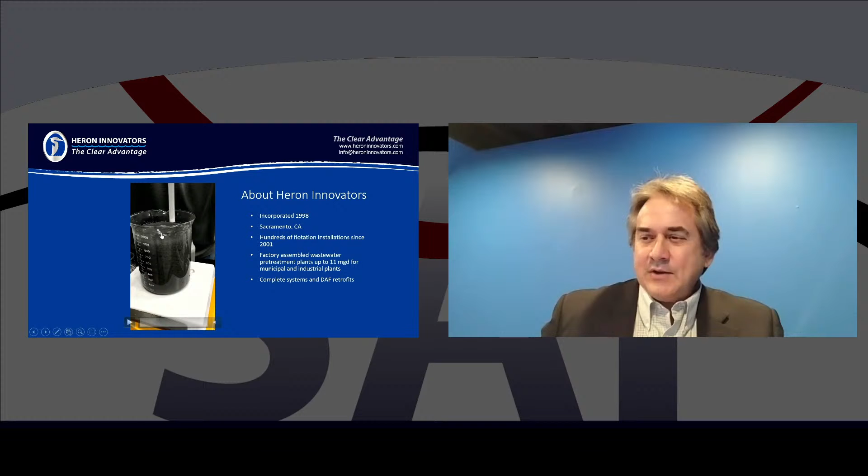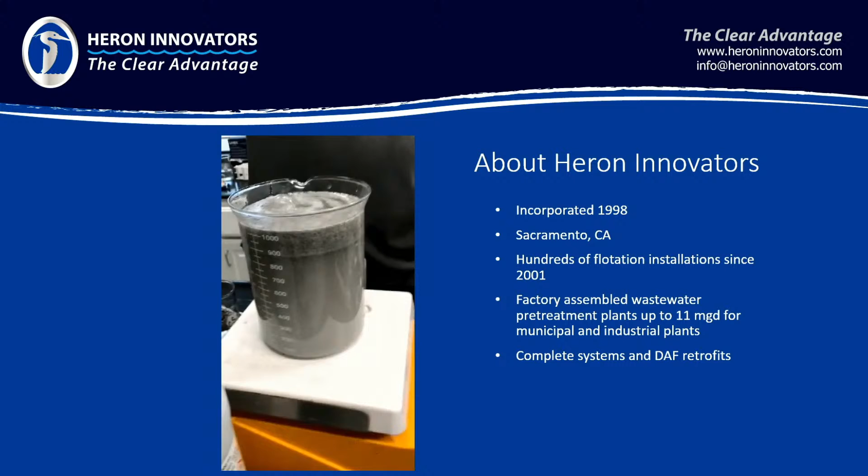This was very odorous material, and I don't know if it's coming through on your screens, but there is a pin floc. We put in just a little bit of coagulant, a little bit of polymer. There's a pin floc there. And what we're going to do is inject this charged microbubble froth. And I think what you'll see is those particles are actually getting bigger as the air attaches to them. And you see we get a very high capture rate, a very fast rise rate, and a very robust float.

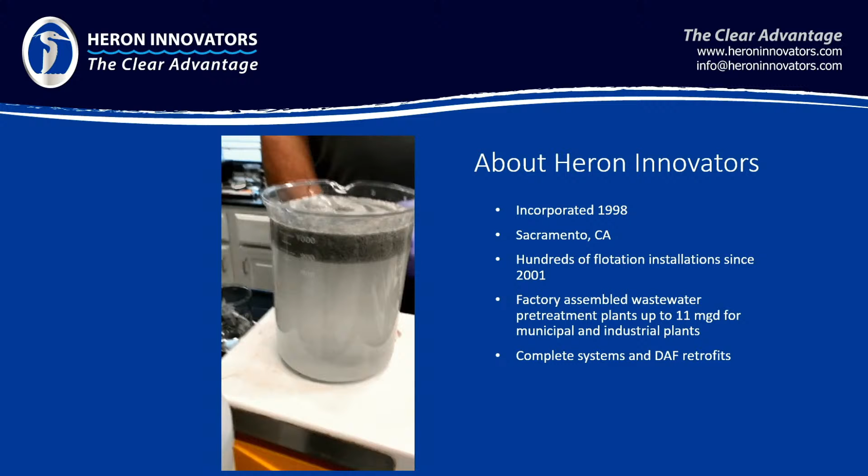And I had the environmental manager of this company standing next to me, and he let out a wow, that's really something. So he and I went around and looked at 3 different installations, one in Missouri, one in Kansas, and the third one was in California, where SAF was installed in all 3, but that California one was actually on anaerobic biosolids. And it was amazing results as well. And in fact, that particular installation was presented at WEFTEC a couple of years ago.

So let's start off with what we said was flotation without dissolved air. So let's talk about how we do that. Get to the next slide. So let's talk about what traditional flotation is that uses dissolved air. And at first glance, SAF looks very similar to DAF, or dissolved air flotation, but when you really dig into the mechanics of how this works, it's a very different technology.

So in a DAF, what you've got is your influent coming into a flotation cell. And then there's usually some kind of recirculation going on where you're grabbing the underflow off the bottom of that cell where the water is theoretically cleaner. You've got a recirc pump pushing against back pressure. You inject in compressed air. Under pressure, air dissolves in water up to a saturation point. What that saturation point is depends on the physics of the process, temperature, pressure, how dirty the water is, but you're going to hit a saturation point.

And then when that water and air re-enters this flotation cell, now you're at a lower pressure. All you've got is the head pressure of the vessel. So little bitty soda pop bubbles are going to come out of solution to float those solids that we flocculated with chemistry upstream, float those to the surface, and there's usually some kind of rake skimmer here where we're going to skim those off and dispose of them. So that's basic DAF. And that technology's been around for 100 years. It's what we think of as a conventional or traditional flotation.

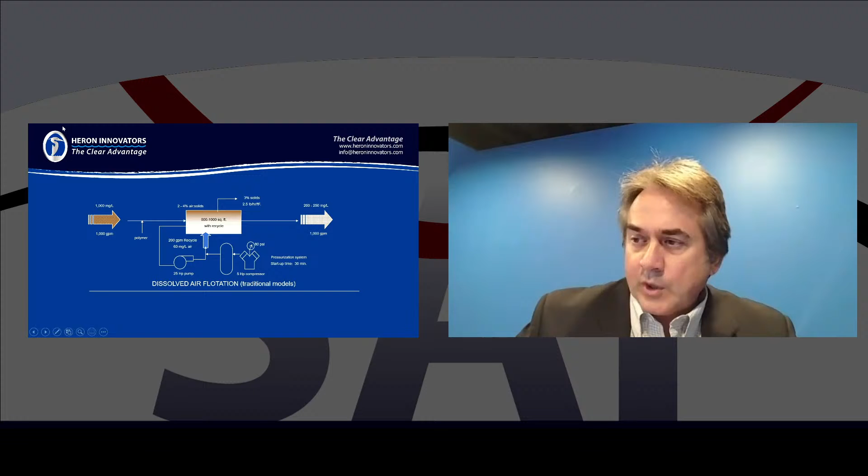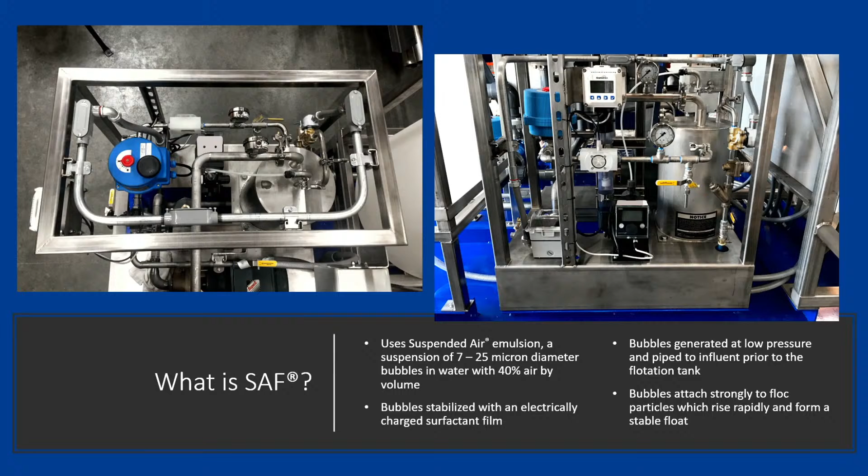There are permutations of this design where you've got cavitating pumps and sparging in air, but we're going to do something a lot different. There's going to be no dissolved air involved at all. So instead, we've got a froth generator. And this is just a little skid. The physical footprint's about 4x4, 4x6 in size. And what we're going to do is create a charged microbubble froth and inject that into the stream right here and stir that charged microbubble froth in.

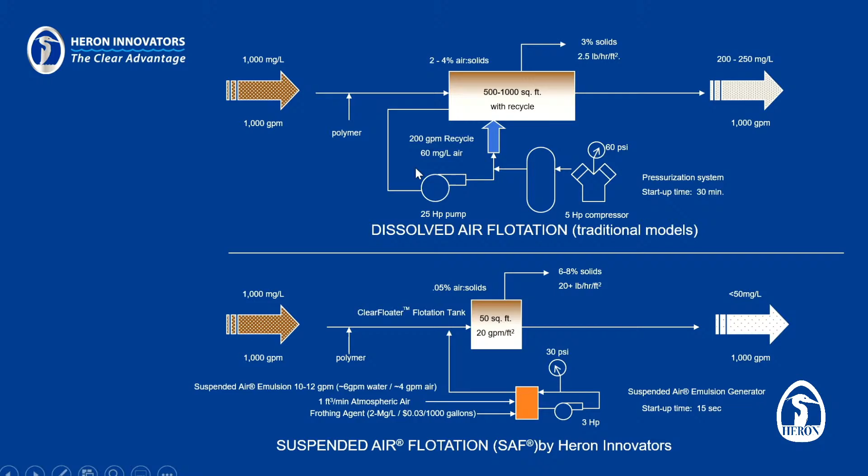I'm going to ask John to describe that froth and those bubbles, because you might think that, well, in fact, let me explain. There's 40% air in this froth. Here you've got somewhere around 2 to 4% air with a DAF, based on what the saturation point is. We're not dissolving air. We're creating this froth with the surfactant, injecting it in, which is 40% air. So we've got a lot more air, but you might think, well, can't you just inject more air? And there are technologies out on the market that do that. They just sparge more air in.

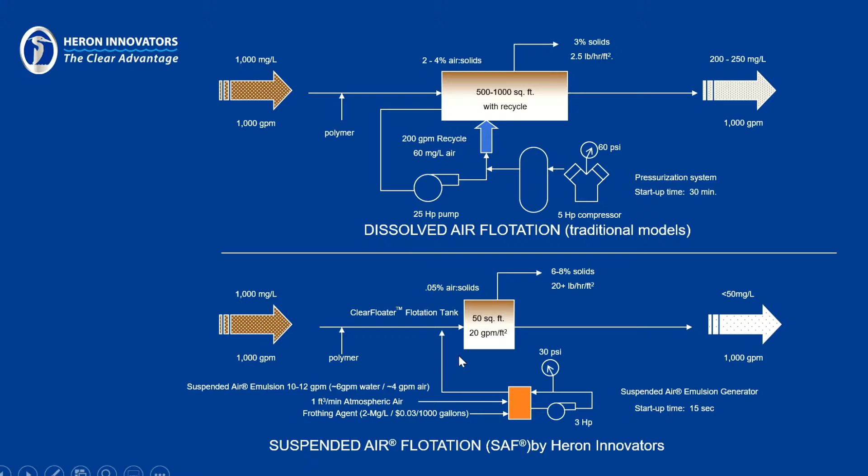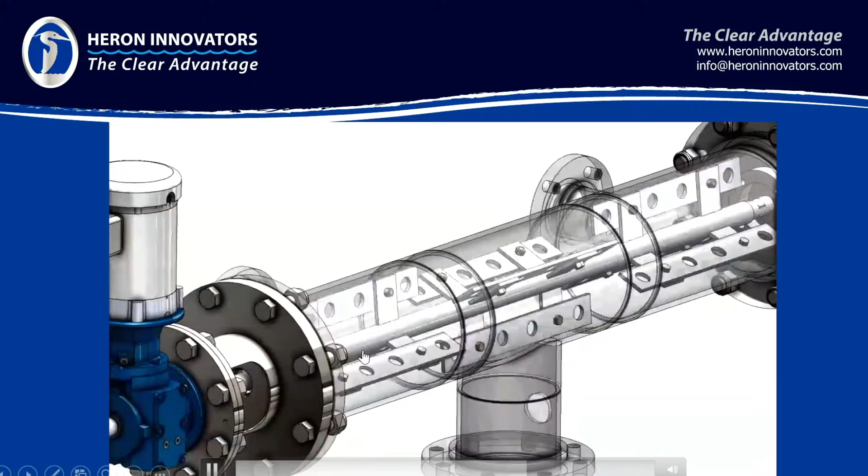But these bubbles are much different. And then they're going to be stirred into the process with something that looks like this. So the influent's coming in here, froth's injected here, and they're going to be stirred in very gently to get a good air to particle reaction. And then it enters the flotation cell.

So John, I started to say earlier, how are these bubbles different than what you might see with this technology? Thanks, Jeff. So, I like to say that we're not bound by the physics of what it takes to saturate air and water. It's because we are actually making a soap bubble.

What we learned how to do is create a population of bubbles that are 7 to 25 microns in diameter. They're actually double walled; in the literature they're called an aphron. Like Jeff said, in our whitewater we're not restricted by those physics, so we're not looking at 2-3%. We're looking at 40% or higher air in what we call our whitewater. It's nothing like a DAF whitewater, of course.

Those bubbles have a surfactant sheath on them, and they have a charge on them. They're anionic or cationic, depending on the surfactant you use. Because of the bubble size, we get a really good electrostatic attraction to the particles. But the big thing is that we have a surface tension advantage over a DAF bubble, and that surface tension advantage overcomes the surface tension of the particle, so we get a lot more air on those particles.

Between the size and the charge and the air, we have about 1,000 times the affinity for a particle that a DAF bubble does, and we actually participate a bit in coagulation lightly. That does translate to some significant chemical savings.

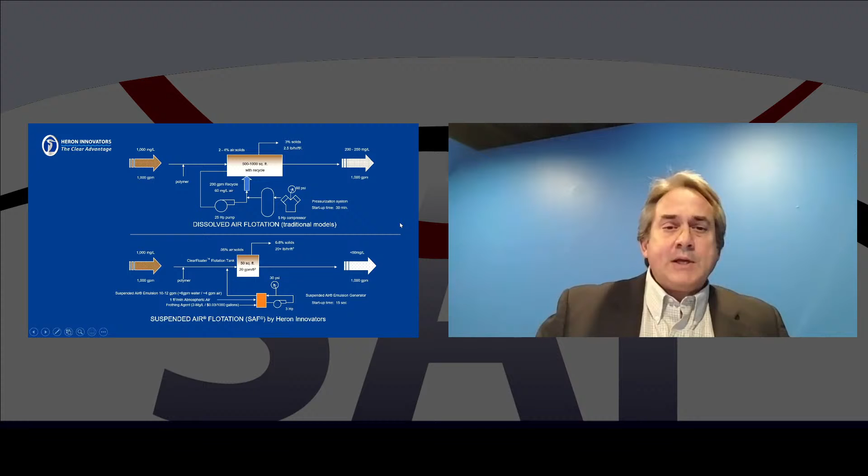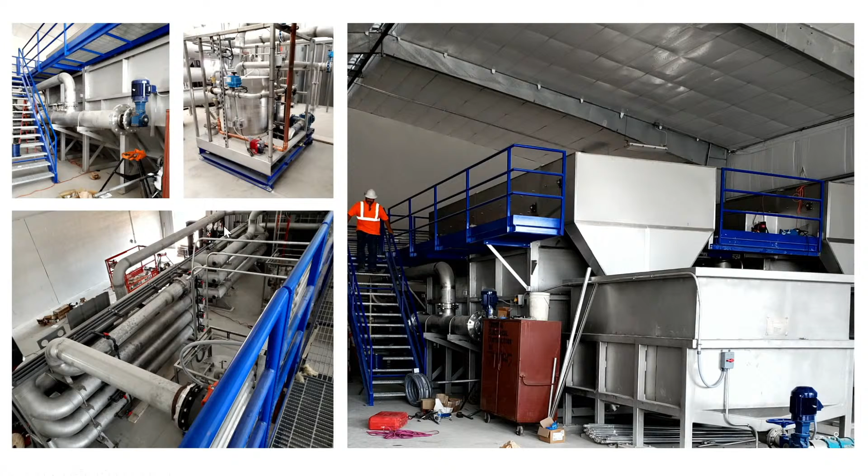So that is a lot of times why we get into clients where we convert DAFs over to SAF and create all kinds of benefits. So let's talk about those benefits, and then we'll go through a couple case studies where we've converted DAF to SAF. In fact, I forgot I have these pictures. John, if you want to talk about these a little bit. We've had diagrams, so now we've got actual pictures of what this equipment looks like. So, John, go ahead, explain this.

Yeah, thanks, Jeff. Up in the upper left corner there is an actual floc mixer on our model CF1000 float cell. You can see the motor and the gearbox driving a paddle mixer that's attached to a VFD, so that we can control the mix energy going into the unit. You might ask why we need that. In the DAF world, you need volume to get enough air. You're moving around 15, 20, 30% of the water, depending on the waste stream.

That's going to mix. We're normally looking at what I call a recycle stream or a whitewater stream that's something around 1% of the flow. I need to mix that quickly without disrupting the floc, so that we evenly react the floc aid with all the incoming water. We see really good advantages of using that, and we've got it on all our installations, including the conversions now.

To the right of that is an SAF generator. That's our secret sauce. That is what makes the foam, what we might call whitewater, and that gets delivered to the process. Any pressure we see in that canister is basically just to create agitation and deliver to the process, as we build no pressure outside of that.

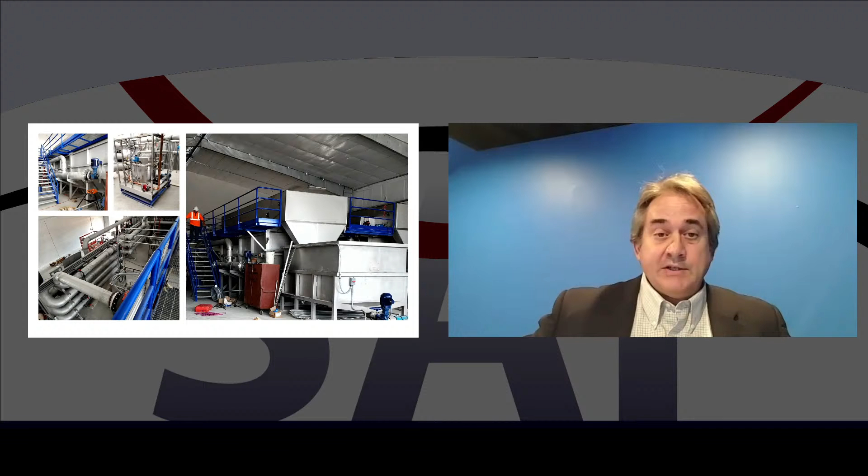So if it's not lost on you, that's 140 square foot float area. It's nearly 20 gallons per minute per square foot. All right, Jeff, back to you. Yeah, the footprint of this, if this were a traditional, conventional style of dissolved air flotation, this would be much bigger, right, John? Oh yeah. 140 square foot couldn't do 2,800 gallons a minute in something where we're feeding in several thousand parts per million solids.

So let's talk about what we see here as far as horsepower difference, starting off with just comparing the two technologies. And John, feel free to jump in anytime, but obviously with dissolved air flotation, you've got that recirc pump that has to push against pressure and recirc enough water to get the air into the flotation cell to lift those solids. In fact, that air is lifting the solids from underneath. There's no physical attraction. In fact, that air wants to repel from the solids because of surface tension. And that's a huge difference between DAF and SAF or any other technology where you're sparging in air.

So the fact that we're not feeding any air into the flotation cell at all, we're attaching all those air bubbles to the particles ahead of the flotation cell. That shows how the technology works. There's no more air injected into the flotation cell to keep that solids blanket suspended. So all that takes a lot less horsepower. And John, you got any other comments on that?

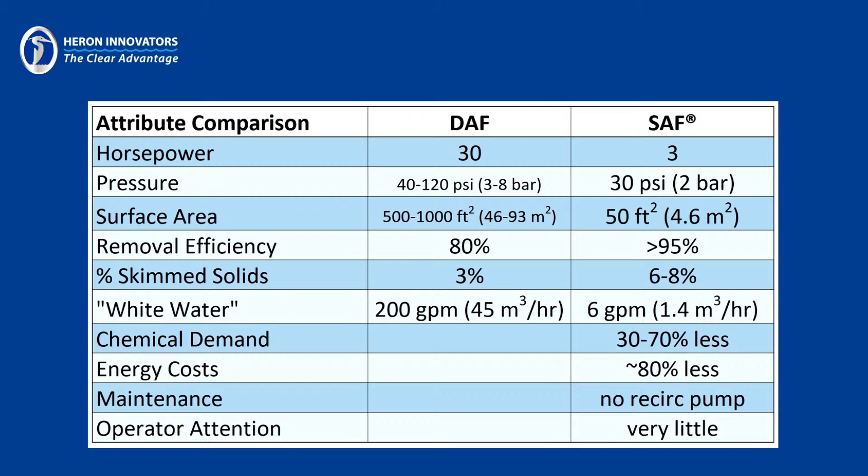Yeah, so one other thing I want to hit on while we're on this subject is that startup. Since we're not recirculating water, we're not macerating those floc solids with the recirc pump, our startup is less than 15 seconds, would you say, John? Easily, yeah. You can start up almost immediately, actually. Let me tell you why we do 15 seconds. We just do that in an abundance of caution to cycle the generator up so froth is ready for the process. But that froth is developed almost instantaneously. 15 seconds seems to be pretty easy to do, so we just do it on our installations.

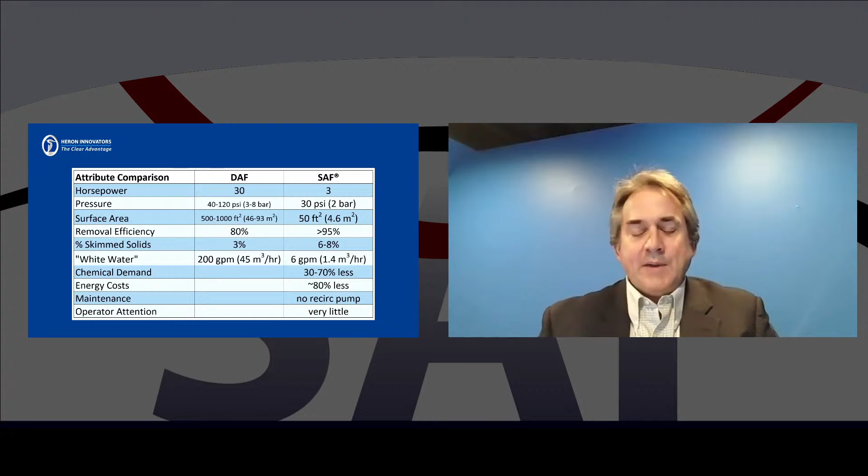Yeah, so I mentioned I visited some installations. One of those was in Missouri at a truck wash. The water came out of tanker trucks; it was vegetable oil that was being washed out. It drained into a pit, and I believe there was an ultrasonic or radar gauge measuring the level in the pit. It would start the system up automatically when the pit hit a certain level, and then shut down automatically. There were no operators. They basically ignored the system. It just kicked on and off. I don't think you can do that with a system that takes a half hour to start up.

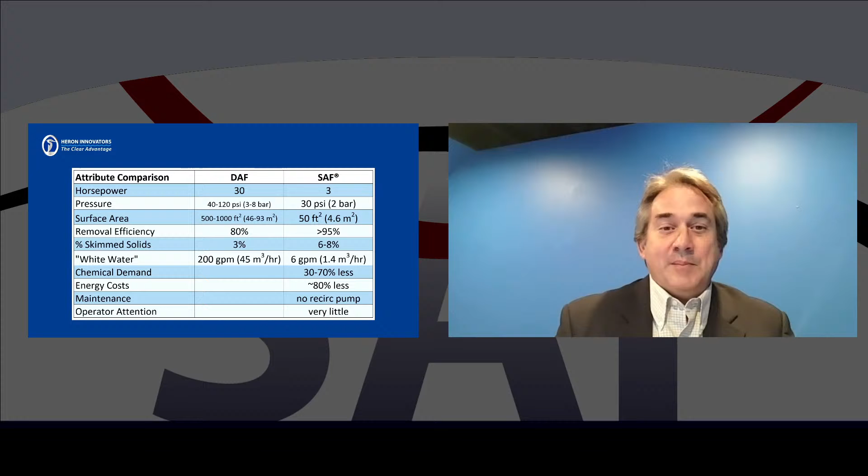Yeah, I mean, our unit in that application. I'm sorry, Jeff, I didn't mean to talk over you. In that application, the unit comes on every 10, 20 minutes for 10 minutes, 5 minutes, right? Pulls the tank down, starts again. As an equipment OEM, we would prefer longer runs, but we can do this. We're not suggesting that we go design to that if we have an option. In this case, we didn't have an option.

Yeah, and I've had this come up a number of times in the last few months, that when you go to size EQ tanks, the way you think about equalization ahead of a system is a lot different with a SAF than with conventional flotation, especially when we get into the smaller flow plants where maybe there's only 20, 30,000 gallons per day coming out of the plant, we could run at, let's say, 25, 50 GPM when the system kicks on.

That EQ tank, often you use jet mixers to keep them aerated, but essentially when you've got wastewater sitting in a tank, that's a fermentation vessel, and you are going to get ammonia buildup. I had one engineer tell me you can just never have enough EQ; he said, I've been doing this for 40 years. And I'd say, well, if I were putting in DAFs for 40 years, I would agree, because it takes a long time to start up a system, and you've got to have that buffer.

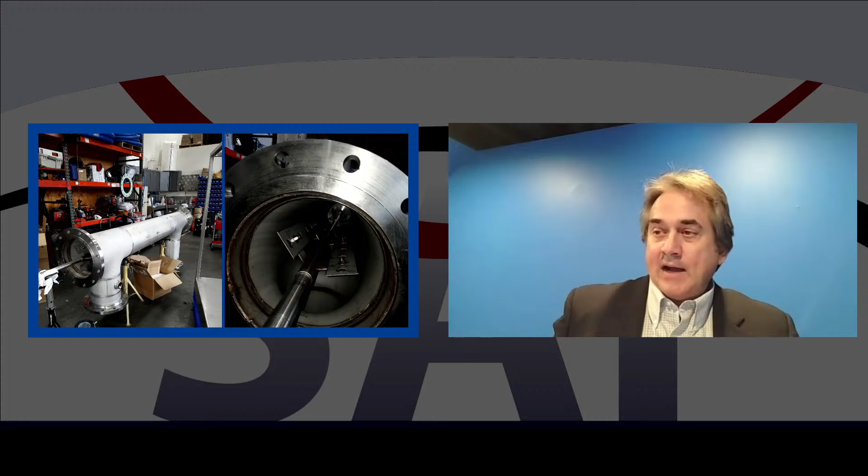All right, Jeff, in the interest of time, I'm going to jump to our case studies. So we talked about retrofitting DAF to SAF, and it really just takes two components. It's a matter of putting in our mixer, as we showed in a picture earlier. We'll custom build this mixer. Of course, this picture was taken in the shop.

So what you've got is a drive on one end controlled by a VFD-driven motor, the influent coming in here, froth injected here. We're going to stir that in very gently where we get that air-to-particle reaction just before it goes into the float cell. These are custom built to fit the existing application.

We're going to be talking about two specific case studies where we retrofitted DAFs and converted them to SAF for one reason or another. Both of these are out of the same plant. We've got a primary DAF and a secondary DAF that were both converted to SAF.

We're going to start off with the secondary, which was treating aerobic biosolids. And again, John, if you want to jump in on any of this, feel free. When it was a DAF, the flow rate was about 1,250 GPM. Our mixed liquor suspended solids level was about 1,500, and they were getting about 60 to 70% removal with that.

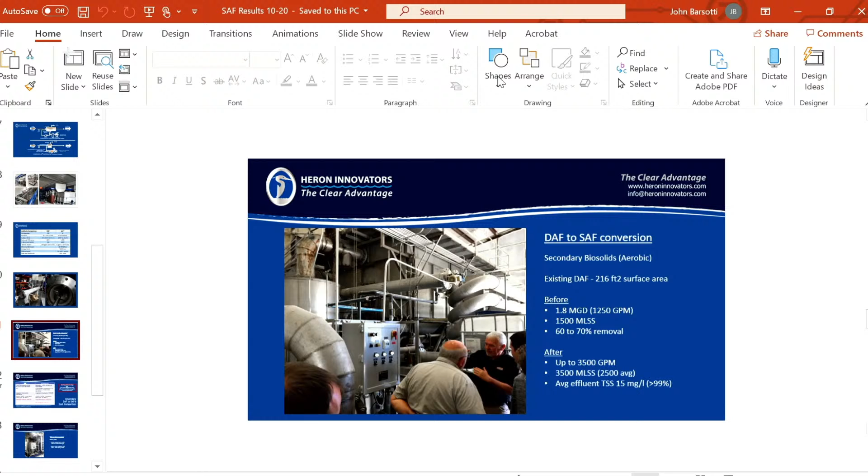And then, of course, after that was converted, there's times when they'll run that up as high as 3,500 gallons per minute and hit 3,500 mixed liquor suspended solids again, but running it on an average about 2,500. In fact, I'm going to jump out of this presentation because I've got a spreadsheet that actually shows the performance on this unit. So let me pull that up. Is this spreadsheet coming through? Yes.

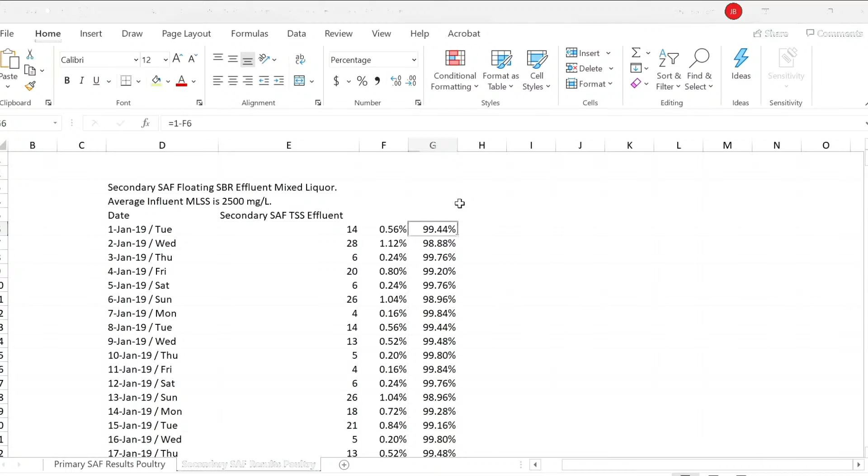All right, so this is 2019, and the environmental manager at the plant was good enough to send this to me. Column G is the removal that we're seeing. This is clarification of mixed liquor solids, and as you can see, we're getting consistently better than 99% removal. And he told us that it was normally running about 60 to 70% removal back when it was a DAF. In fact, I've often brought clients into this plant and showed them these systems. John, I think you have too.

And one day last fall, I think it was October, let me see if I can find it, right here, Thursday, October 10th, I had a potential new client with me. He wanted to see SAF in operation. We walked into the lab before we walked in to see the unit, and the lab manager looked up, saw me, and said, "Oh, I wish you would have been here this weekend. We had a little upset in our plant." And I'm thinking, oh, that's not good, especially when I've got potential new clients standing right next to me.

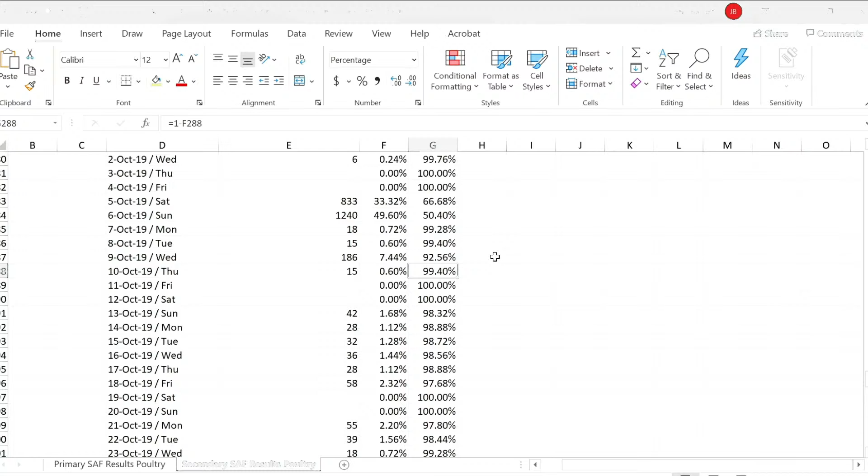And she said that the Lovejoy coupling on your froth generator went out, and maintenance decided not to fix it until Monday. That happened Saturday. The reason they decided not to fix it is because they still had the old dissolved air system on that particular unit that they could just switch to. The froth generator was already off because that coupling went out, so they turned the dissolved air system on. That was Saturday.

And so this is the best example I've got of, all things remaining equal, DAF compared to SAF. This was the day that the SAF became a DAF again. So you can see the difference in removal on Saturday, Sunday, and then of course Monday, that repair. They had the Lovejoy coupling sitting on the shelf, about a 15-minute repair, and they're up and running again.

John, you got anything else you want to add on that? I'll get into some actual numbers on costs on this, but anything else? I actually think we ought to move on, Jeff. We're kind of running a little bit low on time. Okay, so let me see if I can start this up again. All right.

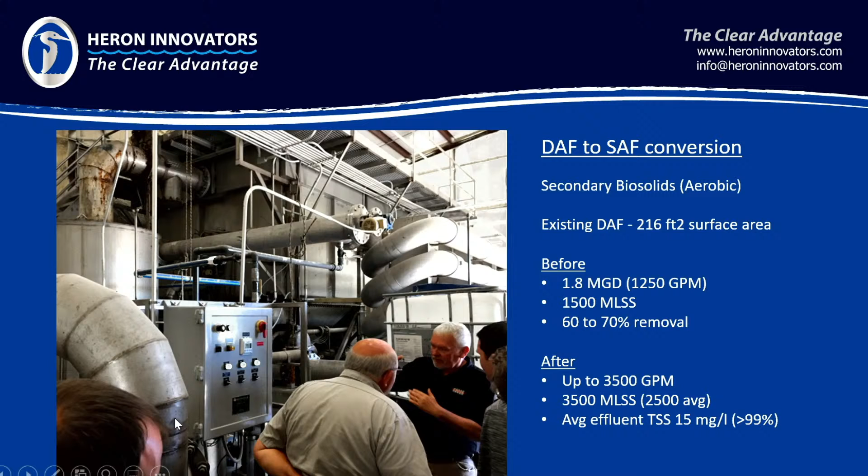I might mention that that company now has 9 of our units in, since they put the first one in about 3-4 years ago, I think. They've told us straight up they'll never buy another DAF. So this here's our froth generator. Here's the mixer, and again, this was custom built for the application.

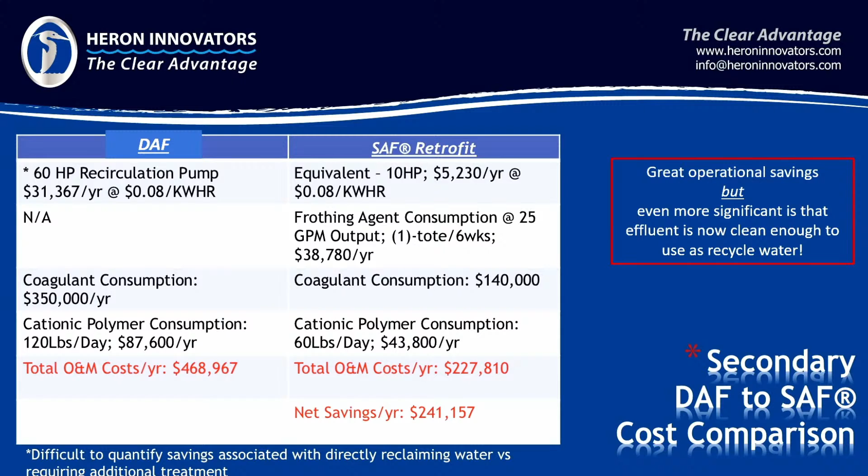So even with the additional flow rate, the additional loading, and of course they realized really clean water after that, so much so that they could use it as recirc water, they still experienced right at $250,000 a year in savings, just between chemistry and energy alone. I believe that retrofit paid for itself in a few months, like 3 or 4 months.

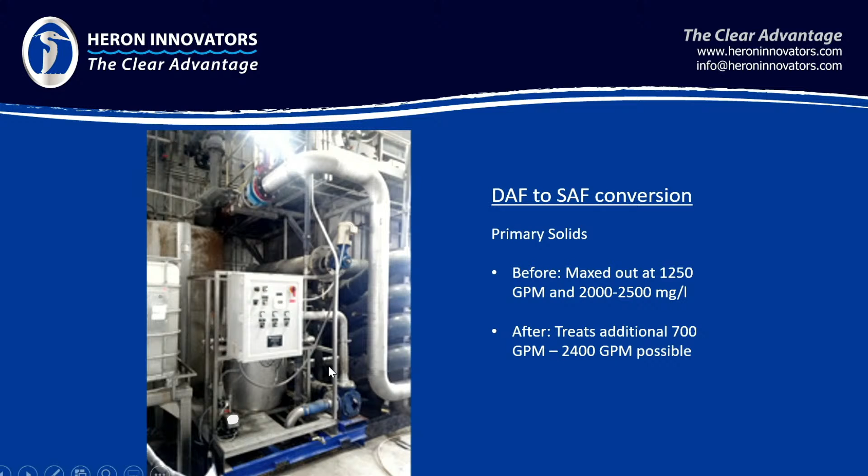So same plant upstream. This is the primary water, and in fact, there's a rendering plant and a poultry kill facility, and water from both of those plants goes to the same EQ basin, which feeds this particular unit. Now, this DAF was performing well before they converted it to SAF.

They were getting their TSS down well below 100. Very good performance, but it was maxed out. They had hit their nameplate on their flow, and they knew they could not get any more flow through this system. But the plant was expanding; they were adding on, and I believe they had in their budget for their plant expansion, they were going to add a building and buy another DAF.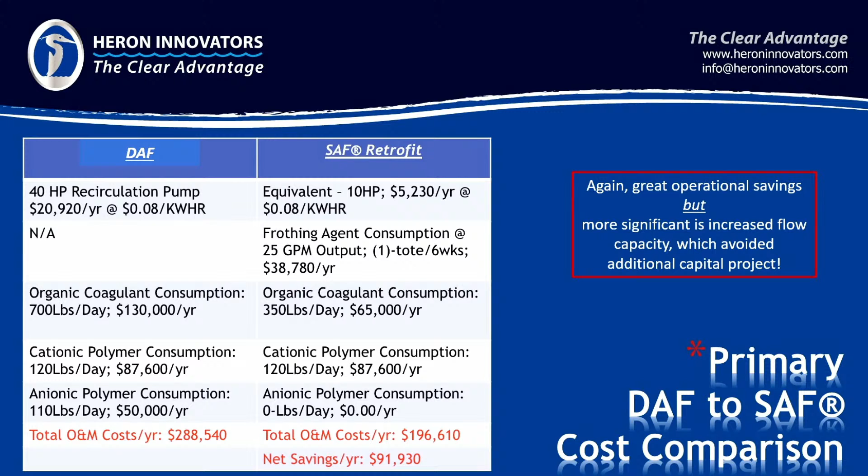And in fact, this picture here is actually the top of that, and this shows how dry the solids can get. A lot of times they'll rake these solids off, and they go into this secondary vessel where they'll do further dewatering. I remember when they started this plant up, John told me the story actually, that they were laughing. He said, well, they got those solids so dry that they wouldn't flow to the pump. So they had to back off on that a bit.

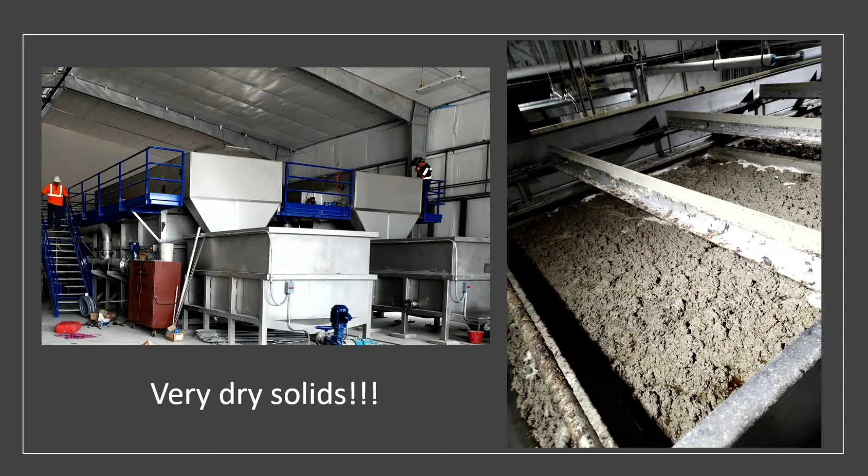So on one of the slides, you had mentioned that the SAF requires very little operator attention. Does that mean that SAF requires less operator attention than a typical DAF? And then a follow-up to that, if so, is that just because of the reduction in horsepower, overall equipment, and polymer needed, or what is the real reason for that?

Jeff, I'll go ahead and take that. Yeah, you know, the DAF is just much more mechanically intense than a SAF, and we designed the unit, other than the patented device, with just straight OEM off-the-shelf materials, and they're generally considered very reliable. So we've had more than one customer say, we don't look in on the equipment every day, though I recommend you do, and that the only thing over years of operation they've done is washed it down once every 6 months or so and greased some Zerk fittings.

So our biggest problem, of course, would be like the metering pumps, which is kind of a typical Achilles heel of a lot of equipment that's feeding chemistry. And then like a water solenoid, and those are things well within the capability of even a light maintenance department. So we find that the startups are easy. They don't require someone's attention to start up. In fact, almost all our systems start on a switch somewhere, without an operator getting involved.